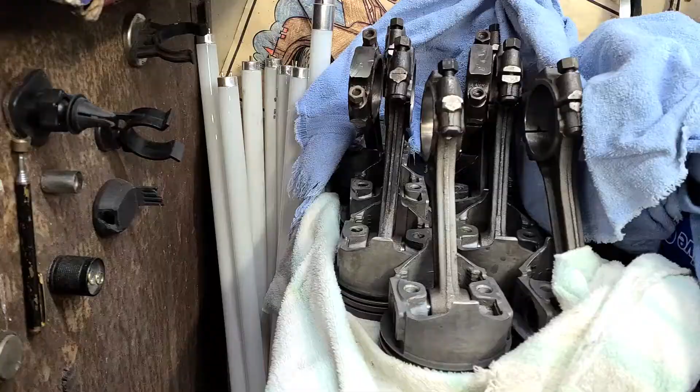Gonna work on the piston rings and the pistons. Going to be putting the new piston rings on these pistons here and getting them all ready to go. They're all cleaned up, and they've been cleaned up for some time now. And they're numbered. So let's just get started here, okay?

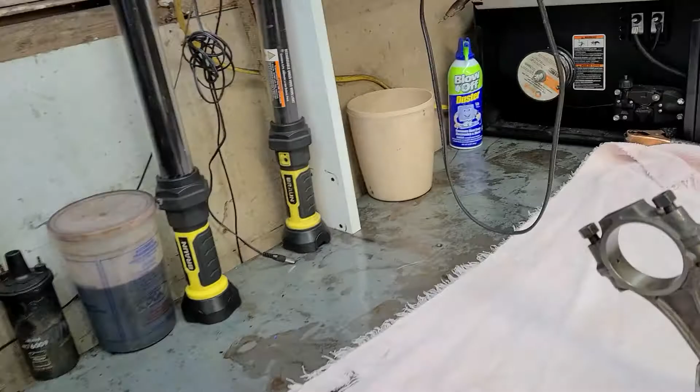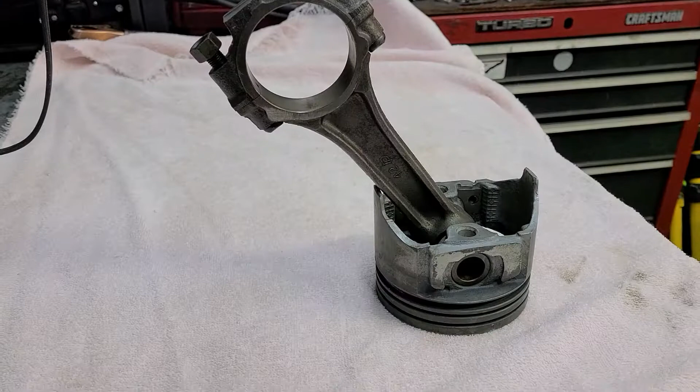All right, as we can see, just a stock cast replacement piston. Basically, what's going to happen today is I'm just going to show you how I put the pistons and rings on these. Get the rods and the pistons ready for the new engine, the 360.

Let's see, so we got the second groove right there. We got the first groove here somewhere. Yep, here's the first groove, top groove. And then we got our oil control rings right here. Alrighty.

So now, the other thing I'm going to do here is show you what I do. First of all, you want to clean off a good workspace in your garage, a good workbench, okay? You do not want dirt. Dirt at this point in time is the enemy of this entire operation. So yeah, this is a situation where you want clean, clean, clean, clean, clean. This is not a time where you need a lot of clutter or crap or just dirt or dust or anything else.

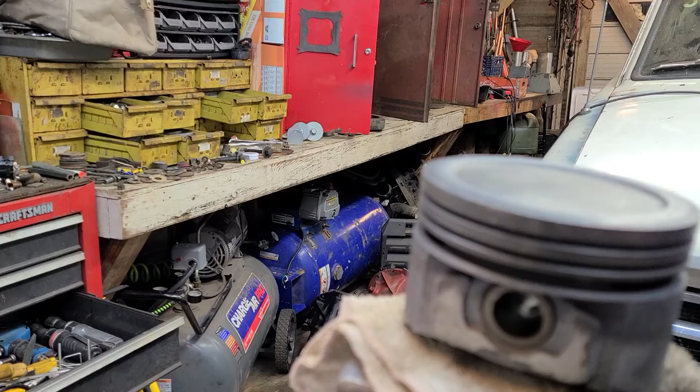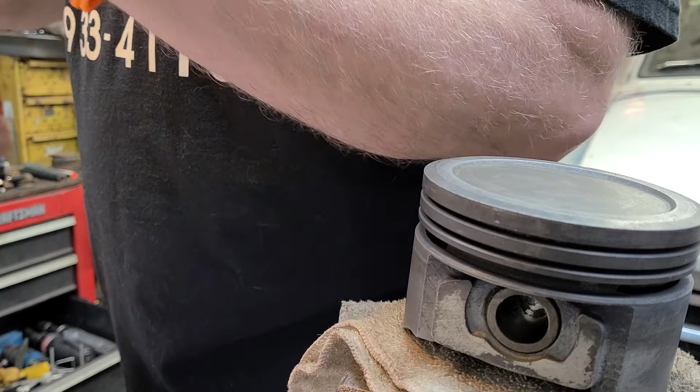Okay y'all, we're back. One other thing I wanted to mention is make sure you have plenty of light, good light. You want to make sure you're able to see things very clearly. You don't want any kind of misconceptions about stuff, okay? And you notice I'm using gloves. You can do this barehanded, I have before. But you'll notice I was about to put the top ring on.

Also, clean up your tools real quick, okay? I'm using these piston ring expander pliers to install the piston rings. You don't have to do that. You can do it the other way with your fingers, your hands, okay, like so.

Okay, I'm going to back the camera up here a little bit so maybe you can get a broader picture. There we go. Now you can use your fingers and do it like this, expand the ring out. I don't really like doing that with my fingers because, well, that's why I bought the pliers.

But oh hey, just realized, wait a minute, pliers don't work on the oil control ring, so you just have to wind them on, so to speak. Now you want to be sure to be careful about doing this. You don't want to go at this real crazy and wide open.

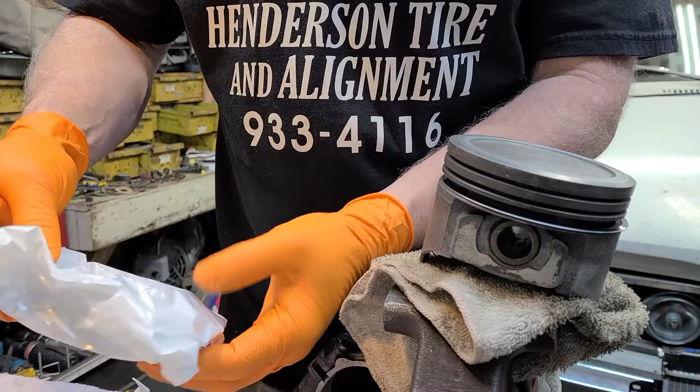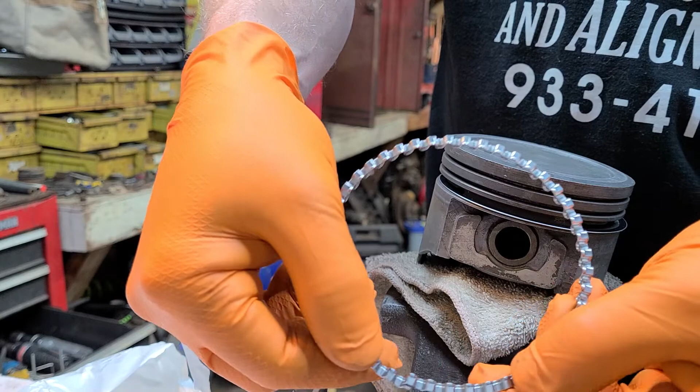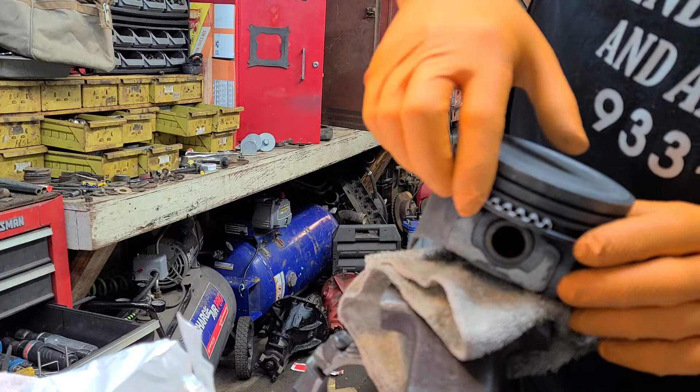Now here is the other part to the oil control rings. So here we go. Now these usually fit in there, and they usually fit like so, okay? So they'll usually go in there when they go into the piston ring groove, they go in like that. The oil control rings aren't that big of a deal. I mean, they are, but they aren't, okay?

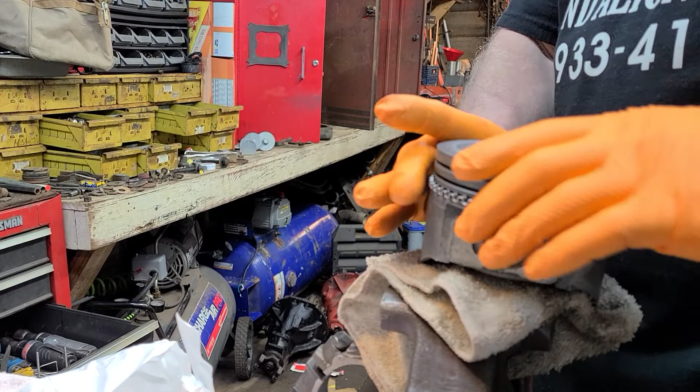This is interesting. Seem to be having some issues with my oil control rings. So I know what I'm going to do. I'm going to take this bottom ring on the oil control rings off first. Get that off and get that out of the way. Hey, learning as we go. Hey, look at there, do it like it's supposed to be done. Guess what? It works.

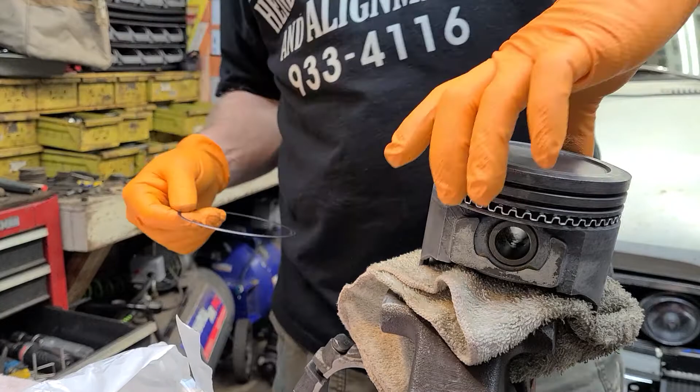Okay, now my gap for my oil control ring, let's see, where is it at? Where's it at? Okay, my gap for my oil control ring is right there. The springy, that up and down portion of the control ring, it's right there. So what I'm going to do on this one is put this portion right here, about right in here. This part will be right in here. Then my next one, it'll be back here. Okay. And then some might say that's not all that important on the oil control rings. I'll tend to argue about that.

I'm using my fingers here. You can use screwdrivers if you're more comfortable with that, if you'd rather do that, that's up to you. You're going to notice these are going to have a little bit of oil on them out of the package. On the oil control rings, it's not all that crucial or critical as far as which side is up. Your compression rings now, that's an entirely different thing. You've got to have them one side up or the other. They are very much more critical about that.

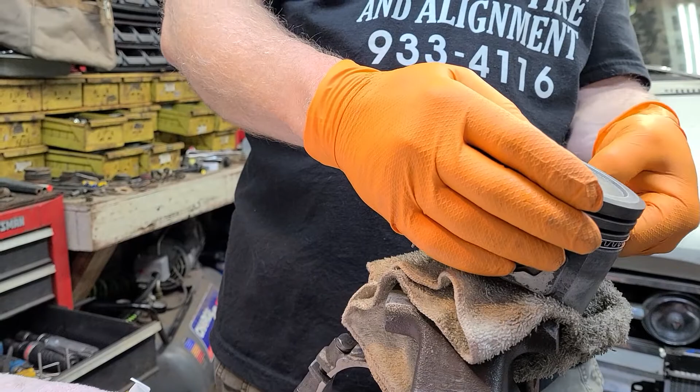So we'll get this sucker on here and just work it on with my fingers. That's all I'm going to do. Okay, there we go.

Now my second ring, it's actually got it marked on the ring. It says top. I don't know if you can see it right there on the camera or not. Let me see if I can get this up here where you can focus on the ring and not my fingers. Well, you can just barely make out something there. I do apologize, but this is the second piston ring. It says top right there. So we're going to put that in.

Now this time I'm going to use my pliers. I like to use the moly rings. Some people like using the cast iron rings when it comes to these older engines. It's entirely up to that person. Some people will be like, no, you got to use this ring or you got to use that ring.

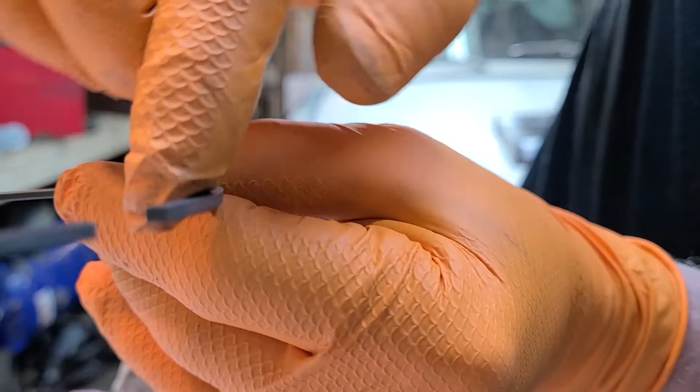I'm going to try to focus on this here again, but let me look at this. I don't know if you can see that on the camera, but there is a taper in here on this side, so that tells me this ring faces up like that. So here we go, put that on there.

All right, now you'll notice I have got my rings staggered here quite a bit from each other. My compression rings especially, I want them staggered from each other. Now as the piston, when the engine is running and the piston moves up and down in its bore, these rings will move just slightly, ever so much, every time that piston is moving up and down. That is what's ideally supposed to happen.

Now what can happen though is a lot of carbon can build up in between here and cause these rings to get stuck. And when that happens, then it starts having some serious issues. Another thing that can happen is when your engine overheats, these can lose their spring.

These piston rings will lose their springy capability. Right now they got a lot of spring back. I can squeeze one of them and it springs right back to where it's come from. So what happens is when they get really hot, that's something that can happen, like when an engine seriously overheats. When it does, that's never going to be good.

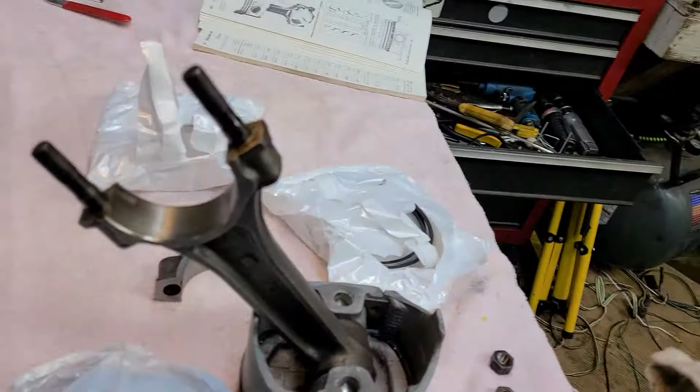I'm going to see, I got the connecting rod cap off. I'm going to go ahead and wipe this down real quick, and I'm going to get my bearings out, show you how to do that. I'll be right back.

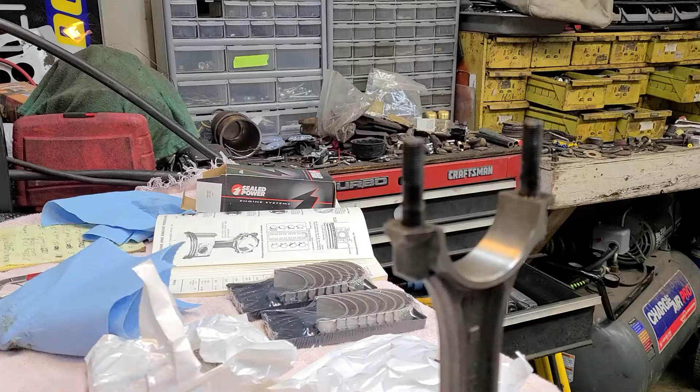Okay y'all, we're back. All right, I got the bearings out. Going to go ahead and tear them open here, and these are my rod bearings, Sealed Power.

Now another thing, look here. I wiped out the saddle where the bearing goes. Look at this dirt that was in there. I sprayed these connecting rods and pistons down with some lubricating oil and had them covered up very well, and they still got a little bit of contaminants on there.

But you don't want anything right here, okay? Any dirt right there can push the rod bearing up a little bit and cause it to sit up away, sit up and push it up.

And give you false readings on your measurement. Now, I have already went through and measured my clearance, but I'm going to do it again once I get my bearings in there, and I'm going to measure the clearance with the bearings and with the rod throw on the crank.

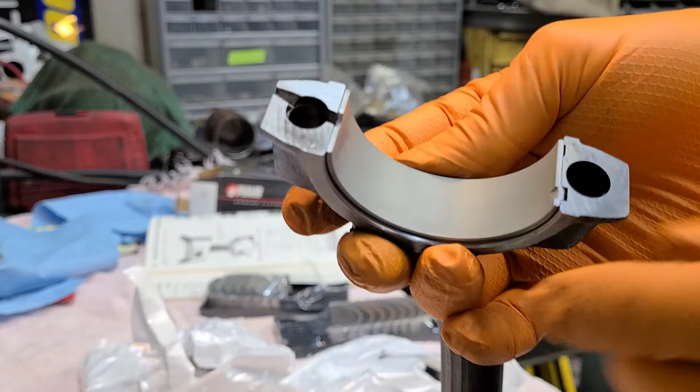So I'll show you how I do that too, and I'll also show you how I use the Plastigage. If you don't know what Plastigage is, it's just a little tape, basically a little piece of wax that goes on the bearing surface of the crank, and then you tighten it down. You can use it on main bearings and rod bearings, but you tighten them down, and when you do, you want that little indentation in the bearing, you want it in that little notch in the rod. You'll notice this connecting rod has a notch right there for that groove in the cap.

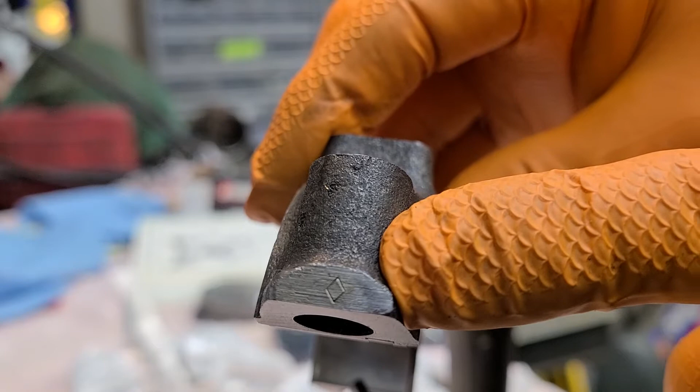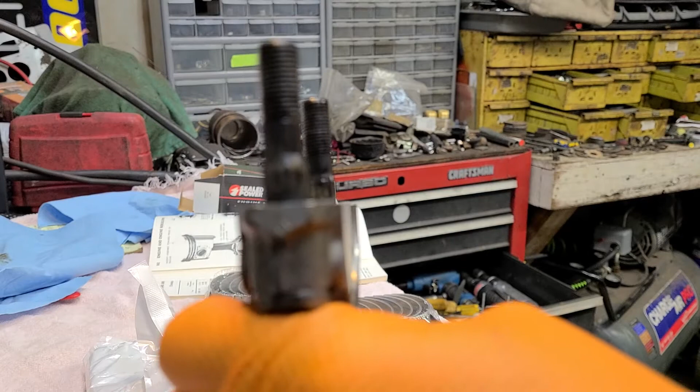So you'll also notice this has, let me see if I can get the camera to focus. All right, see that little diamond right there on the cap? The rod has a corresponding diamond on it. I don't know if I can get it to show, but it's there. All right, so there we go, that one is done.

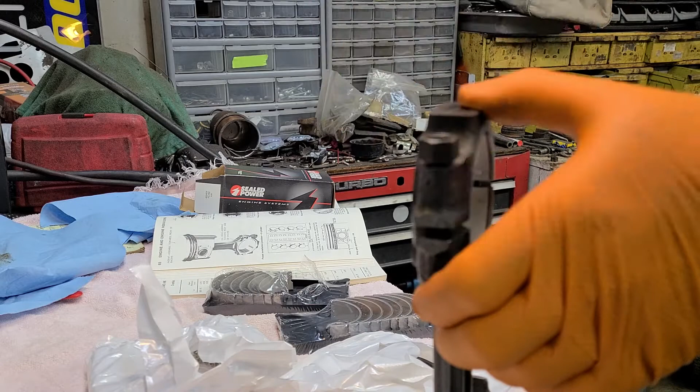Okay, I'm going to run these down, and once they're run down and torqued, I'm going to take my measurement in here with my caliper. Then I'll measure the crank journal where this runs, this is number 3, so I'll measure number 3.

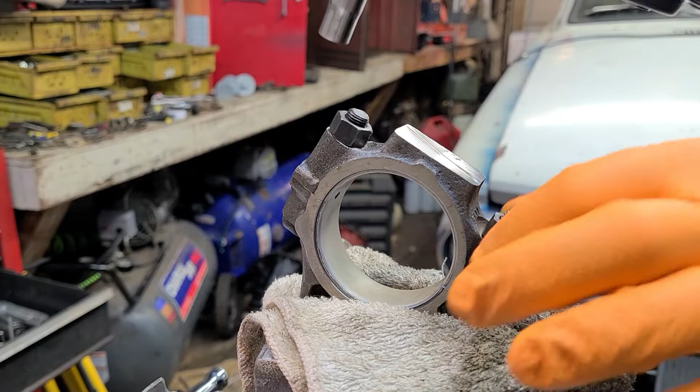Let me get a socket and everything, I'll be right back. Okay y'all, we're back, and I've got my connecting rod chucked up in the vise here, just a rag to protect the surfaces of the connecting rod. I don't want the rod to get gouged by the jaws of the vise.

So I'm just going to torque this down, once I set my torque wrench correctly. I'm going to do it one side at a time, try to pull it down as even as possible. So I didn't go the full 45 the very first time, I pulled it down in increments.

Okay, so now I want to measure, and then compare the measurement in here with the measurement on my crank journal, my rod journal, on the crankshaft. So, okay, I've zeroed out.

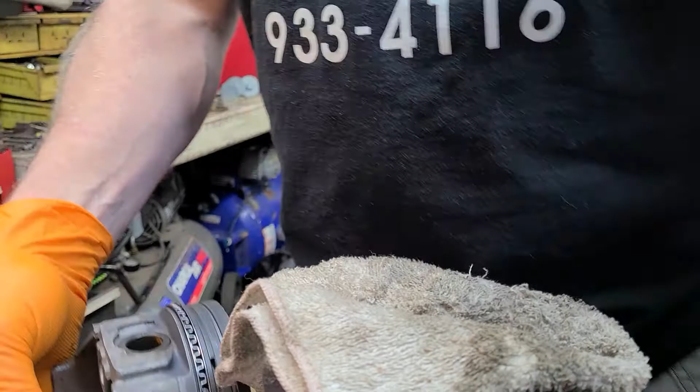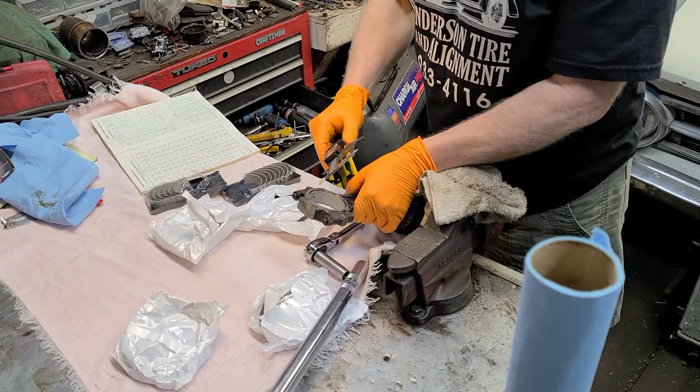Let's see, have to do this more than once, don't be alarmed if you do. Let me set y'all up here so you can maybe see a little bit better. All right, 2.118. Let me see.

All right, now I'm going to go measure my journal on my crank. Take you all over here, let you see what I'm doing. Okay, so here's my crankshaft, here's number 3 journal right there.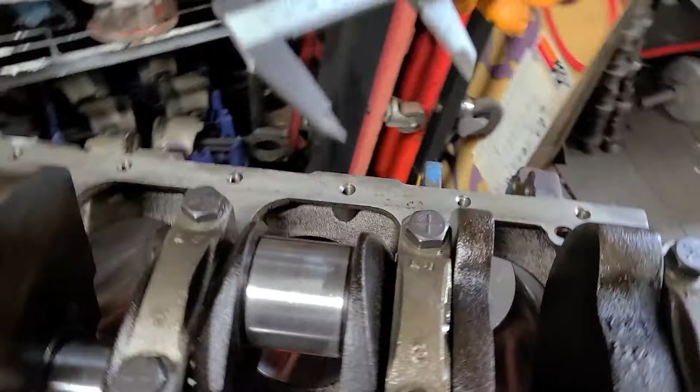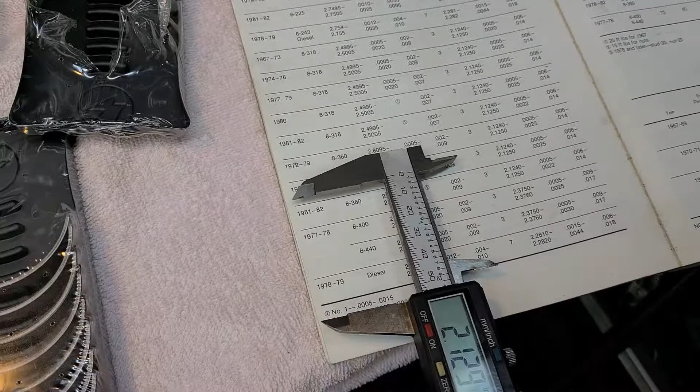2.129. What does my book say I'm supposed to have? 2.129, let's see, 72 79 360. Yeah, 72 79 360. And I've got 2.129. So I'm running a little bit small.

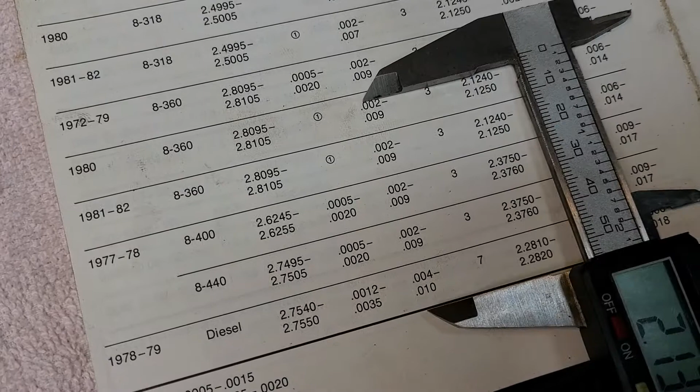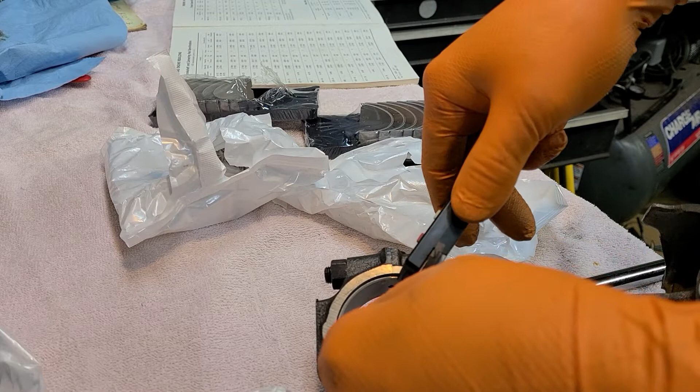Now I'm going to measure this again real quick. Let's see, 2.130. And this was 2.102. .117.

Okay, so let me do a little math and do a little figuring here what I've got to have. I will be right back and show you what I did.

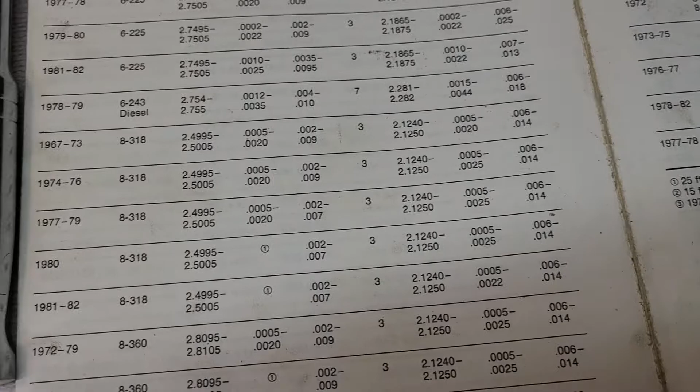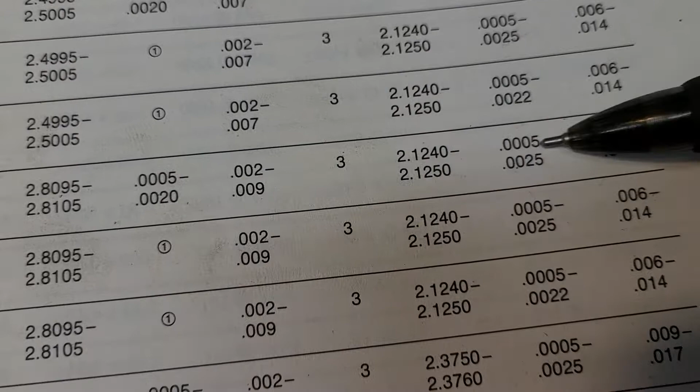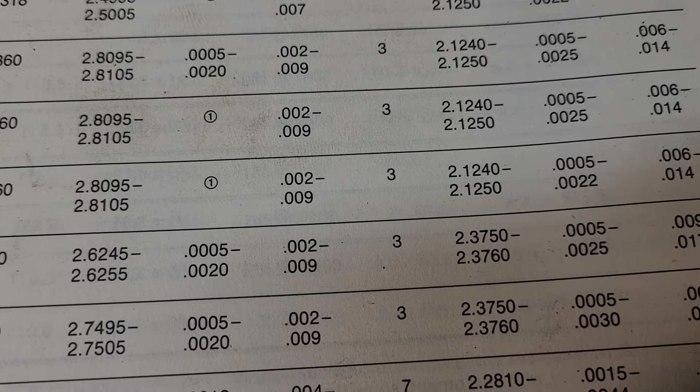Okay y'all, here's what I came up with. 72 to 79, 360. Here's my connecting rods, 2.1240 to 2.1250 is what it's supposed to be. I've got 2.130. My oil clearance is supposed to be 5 to 25. I've got 7. So that's pretty doggone good right there, that's not too bad at all.

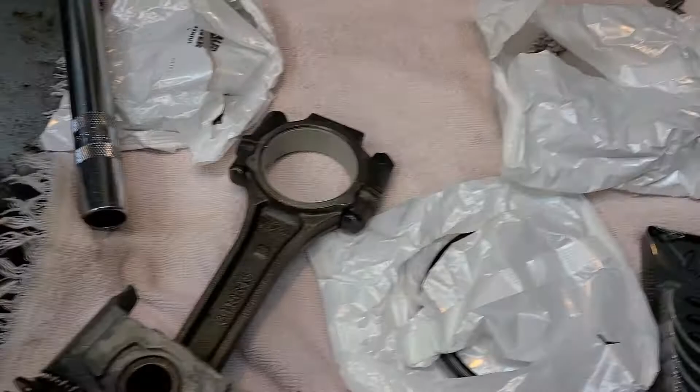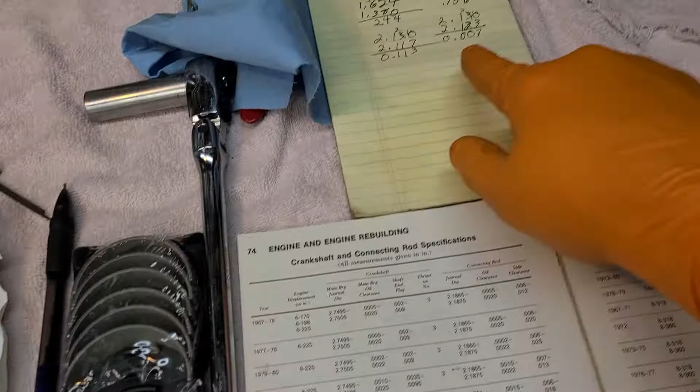So if you're assembling an engine, building an engine, machining it, whatever, take notes. Please do, it's just a huge help. And also, pay attention to that stupid little decimal point.

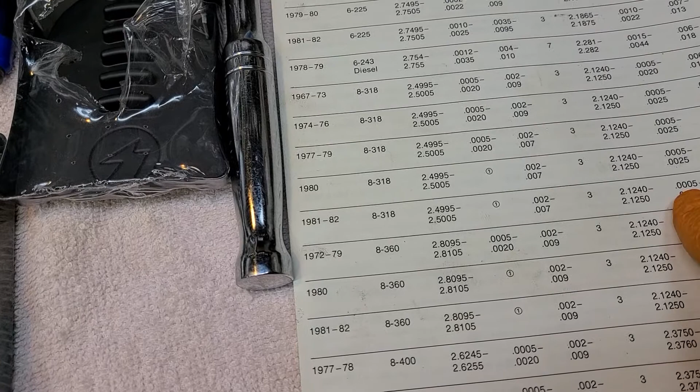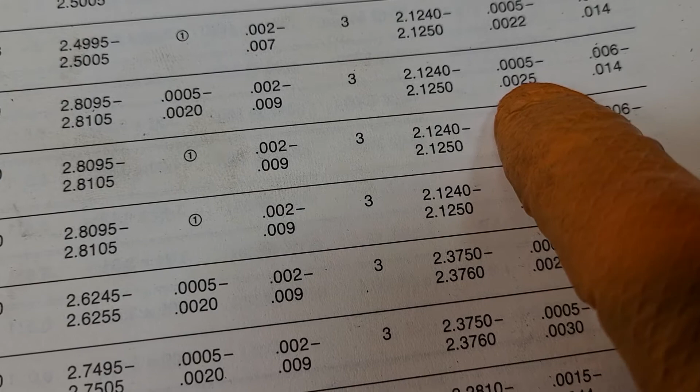So I'm not down here close to 5, I'm up here, like close to this 25. So I'm still within spec, so that's good. This engine, when I took it apart, before I took it apart, this engine had excellent oil pressure, so there's no problem there.

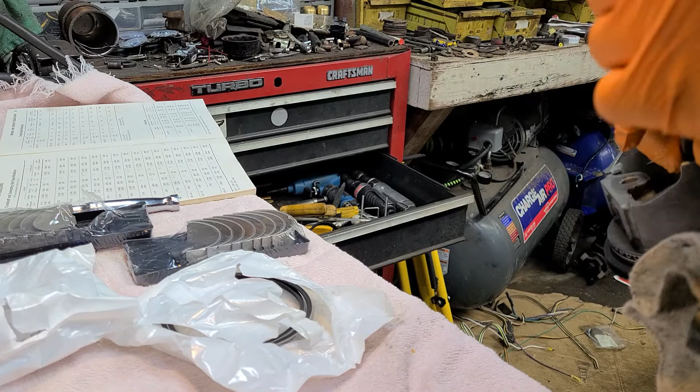Okay, enough of this me talk. I'm going to release the torque on this, put it back in the vise, release torque, and then I'm going to do the rest of them and get them all prepared to go in the engine. So let me just go ahead and do that and show you all. If I come across anything on the way there, I'll show you.

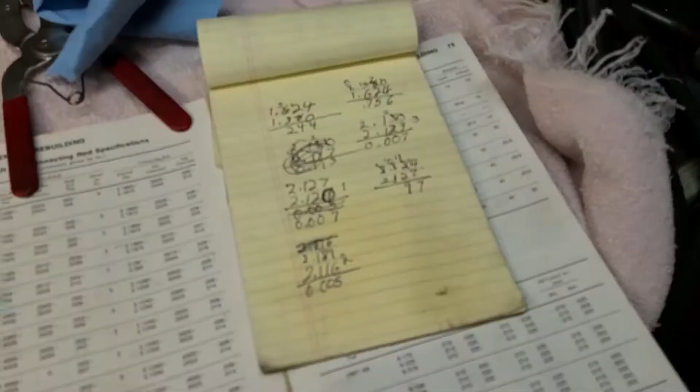Hey y'all, I just realized my camera is almost out of battery, but I'm still carrying on. And if anything crops up, I'll be the first to tell you what's happening. So what I've done so far has been just checking clearances, measuring, torquing, fitting everything. This kind of planning, this kind of measuring and checking, this is the homework that pays off.

Am I like some sort of pro engine builder? Not by a long shot. But I built the engine in this Barracuda right here. Yes, I know I've got a bunch of crap all over it, I'll clean it up. But I built the engine in the Barracuda, and I've built other engines before too. I built some engines in big rigs, and they turned out really well.